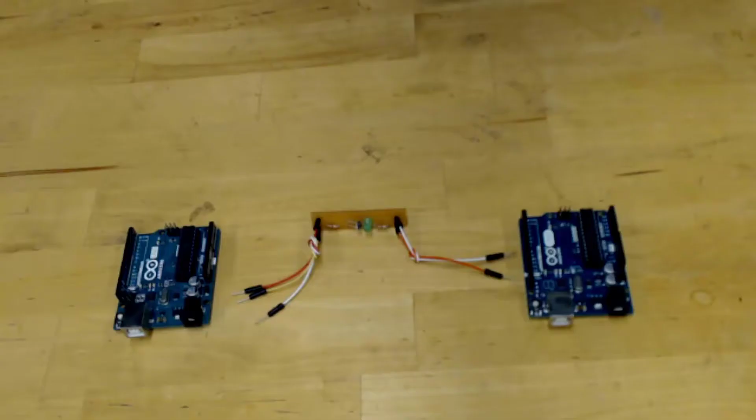Today we're going to build something called an optical isolator on our PCB mount. It's going to allow us to send a signal from one Arduino to another. We have an Arduino running MATLAB that sends a signal to turn on an LED, which is then interpreted by another Arduino running the Arduino IDE. We'll do this all through a PCB in the middle.

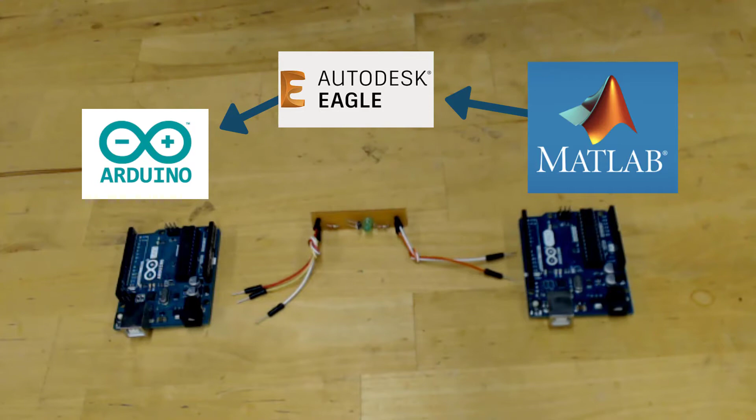To start this project, we're going to be using a software called Autodesk Eagle, which has a free student version.

When we open up Eagle, it's going to look like this. This is very much a navigation page, which allows you to go make either board layouts like we saw on the circuit board, or schematic layouts, which show how the wires are connected within it. It packages things into projects, and I've got one down here that we'll be utilizing and developing today, for my optical isolator.

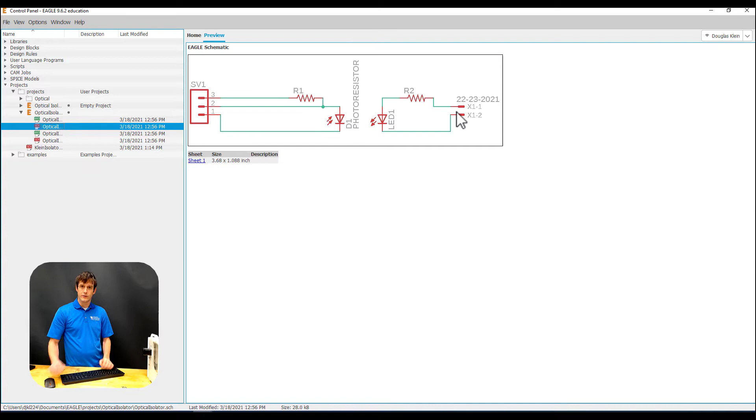This green E is the beginning of my project, and inside that I have my schematic, which is the layout we have here. These are 3 pins going to my Arduino, a resistor, a line for voltage reading, and a photoresistor, so it's just a voltage divider with a photoresistor. On this side we have an LED and a resistor, and then 2 more pins that go out to a different Arduino.

When I build this into my board, it's going to look like this. I've tried to map out where all the wires are going, so there's spacing, and so my components are close enough together to be easy to arrange.

To get started here, I'm going to click on New Project. It's got it down here now, and I'm going to title this as my last name, which is fine. I'm then going to go in here and click New again, and start with the schematic.

Our first step is to import our library. I'm going to go up here and click Open Library Manager, go over to Available, and click Browse. I've downloaded a library file called Optical Isolator Library, which has just the components we need for this build. I'll select Open, and we should see it populate in here—there it is right there. I do need to click Use; if I don't click Use, it doesn't go into the system.

Now I can close out of this and start adding my components. I'm going to go down to my optical isolator and bring in my 3-pin connector, working left to right the way you saw in that image earlier. I'm going to place that right there, my 3-pin connector.

Then I'm going to add a resistor. Notice it doesn't let me set the size of the resistor here, because we're only worried about the PCB, which has those holes there. Then I'm going to add my photoresistor, right there.

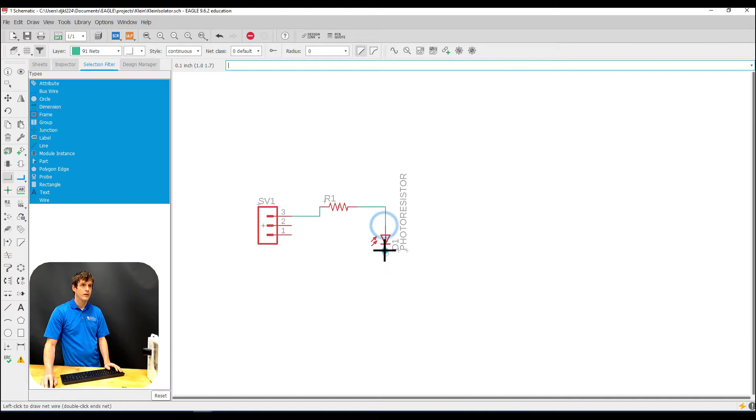Since I have that there already, let's start making connections. I'm going to go right here to there, right there to there, and back around to there. My middle pin is going to be checking for my voltage divider, so I just need to connect right there, and the dot lets me know there's a connection. We're now going to make the opposite side here.

So now that schematic is done for what I want it to accomplish. In other words, I want wires to go from my board to here to set up my voltage divider, and I want wires to come from my other Arduino to just light an LED up.

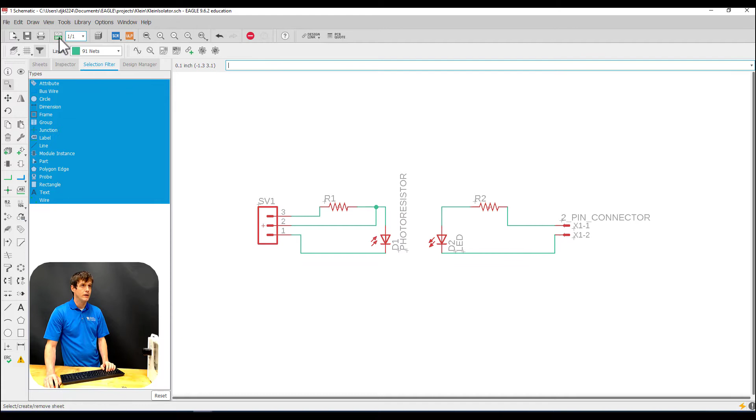Next thing we need to do is develop a board file, and there's a button up here that does it for us. It asks if I want to create one from the schematic, and my answer is yes. When we go into the board file, it opens up this space, which is the board I'm going to work with, and down here are the components I've inserted along with the connections we've placed. I just need to bring these over and space them correctly.

So I'm going to use my move command right here, click on one of my items, and drag and place it. When I right click, it allows me to rotate it, which is nice. I'm then going to use the move command again and drag that—right there looks good—and use the move command again to put this one right there.

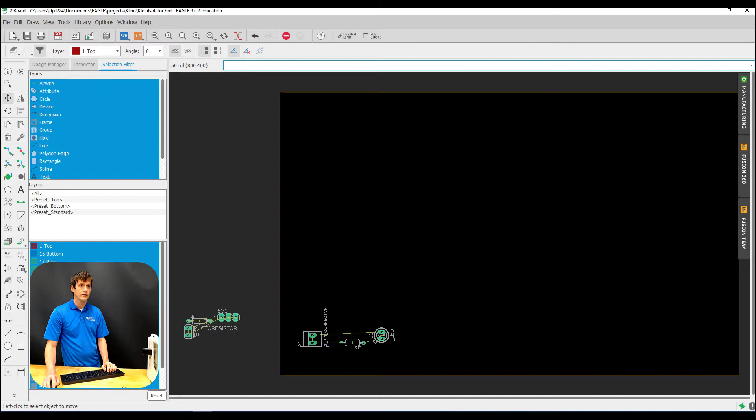I'm trying to make it so the wires aren't crossing over each other, so I spun that resistor around because I had the wires coming from this side of the LED. And then you're going to do the next one.

Now with things oriented correctly, I want to drive everything to that bottom corner so I can be conservative with my board. Once I have the setup where everything looks compressed, I'm going to grab the corner of my board by scrolling my mouse wheel, and direct it to where it's nice and flat.

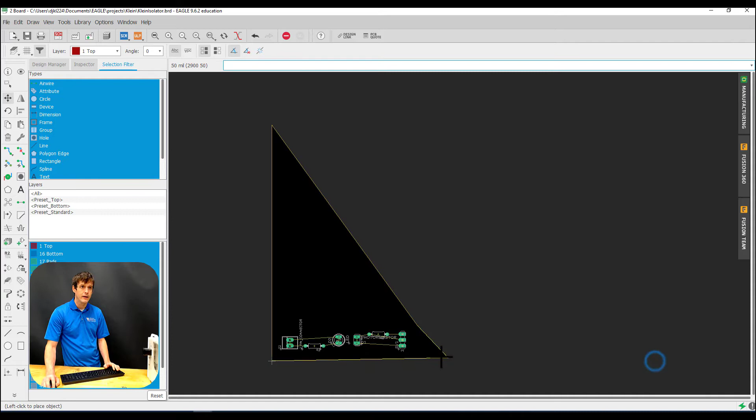Now that I've got all my parts in the right spot and my board shrunk down to where it needs to be, I'm going to add my traces, which are my wires in this situation. I'm going to route a wire, and before I do, I'm going to set the wire width all the way up to 20, which is just talking about the thickness of the wire we're adding.

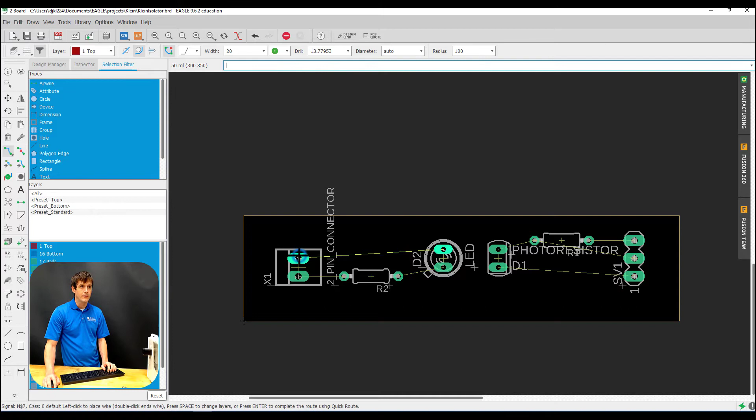I'm now going to add a wire down here, add a wire here, add a wire to there. We're kind of doing a little Ghostbusters here, meaning we can't cross the strands, so I'm trying to give myself some space as far as how that works.

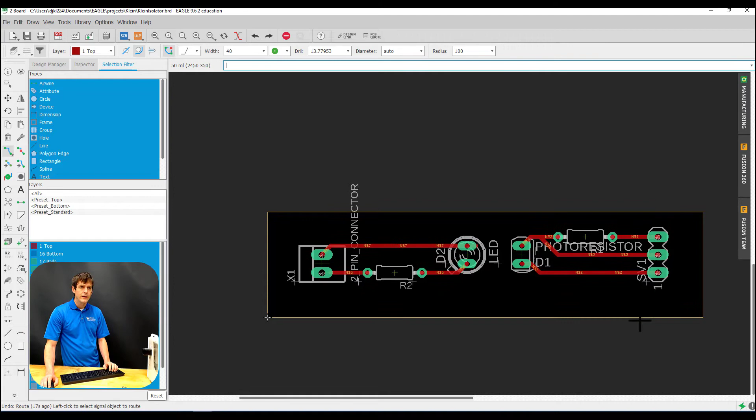That's looking good, but I see that I have plenty of room to make these wires bigger, so I'm going to go in and retrace them again with the 40 width.

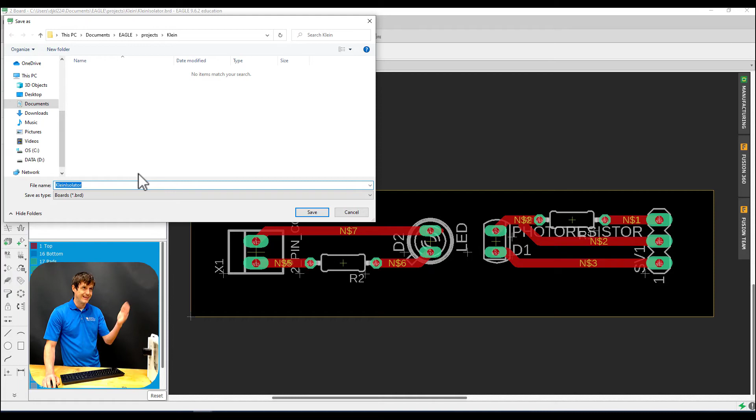Once I have that done, I'm in good shape to save this file. I'm going to go File, Save As, and save it as my last name, as the board file, or just click Save there. Once I've done that, I can take it over to my PCB mill and start milling it.

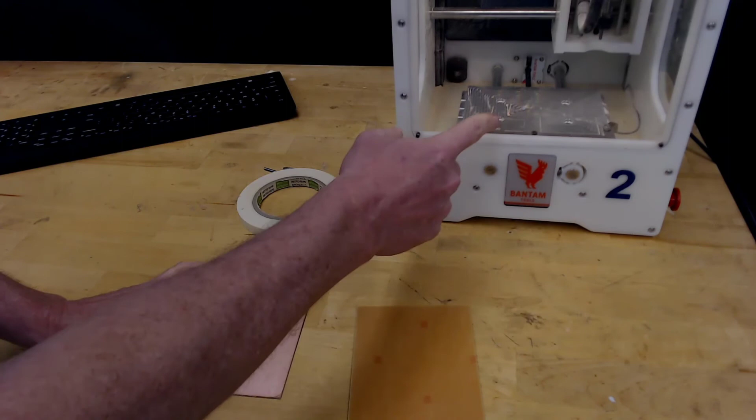Once my machine is ready and homed, I want to be able to utilize a single-sided PCB board, and I'm just going to use the tape which comes with it, which is Nitto tape.

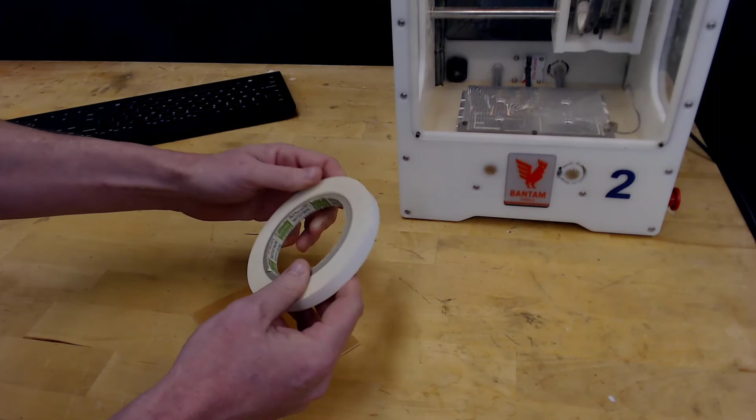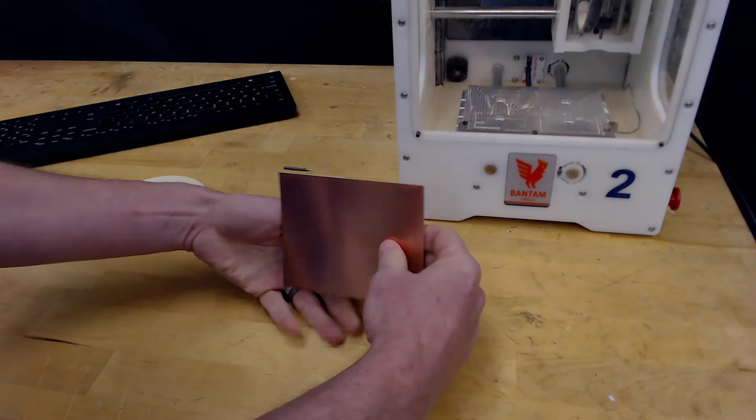I'm going to put one strip down here, one strip on the top. Screw down real good, pull the back side of the tape out, and then place that inside the machine. Press it down real well.

Now what we need to do is open up the Bantam Tools software. This isn't going to work without the machine actually connected to your computer, so you may have to go to the lab or find one of these machines to work with it.

I'm just going to check real quick—I'll not worry about the tool right now. I'm going to check my fixturing in my bracket, which is there. I have a single-sided PCB in there, which is great, and I have homed my machine.

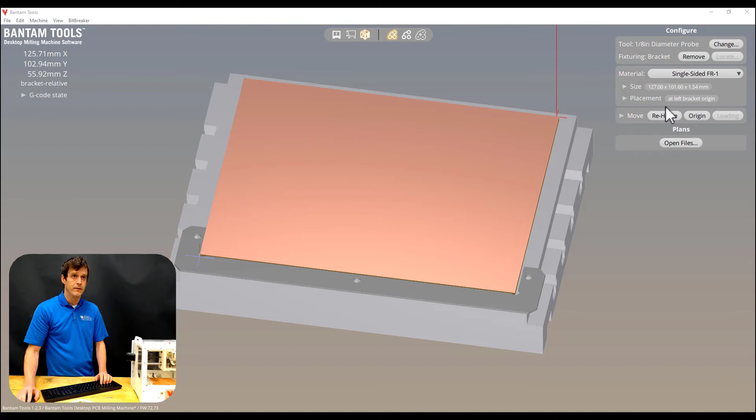Now I can go through and actually add a file that I'm working with. I'm going to click Open File, navigate to my file, which is an Eagle Projects Klein, and I've got Kleinisolator here. It's going to be the board file rather than the schematic. Open.

I'm going to zoom in. Beware, it does allow you to sort of work with the placement.

The first thing I'm going to do is my traces with my PCB engraver bit. I'm going to have to insert that bit, and when I select change, it will walk me through a prompt of how to change that tool. I'm just placing the bit in the collet there. Once that's good, I can click Mill All That's Visible, and it's going to go around and cut these parts for me.

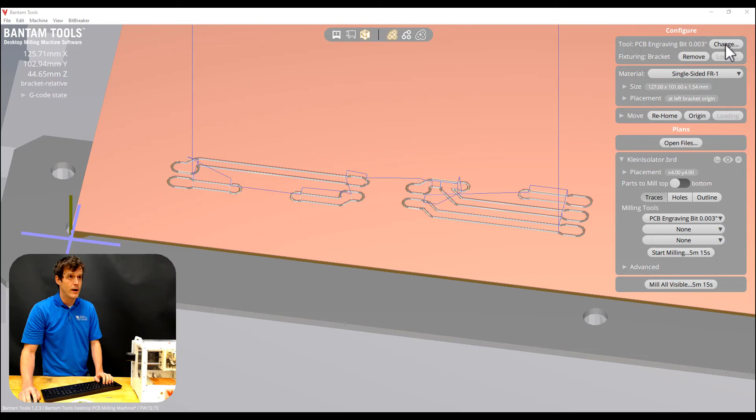Now with that done, I'm going to go through, deselect traces, select holes, and insert my 1/32 flat end mill, changing my bit out to it.

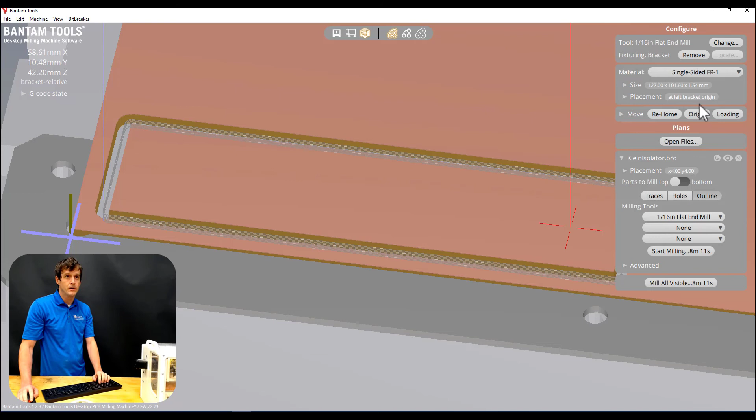Our last step here is just to do the outline, and I'm going to remove the holes with my 1/16 flat end mill, going through and changing the tool out.

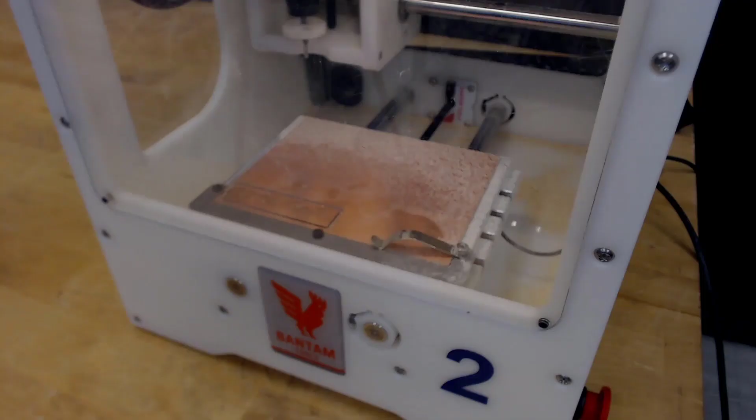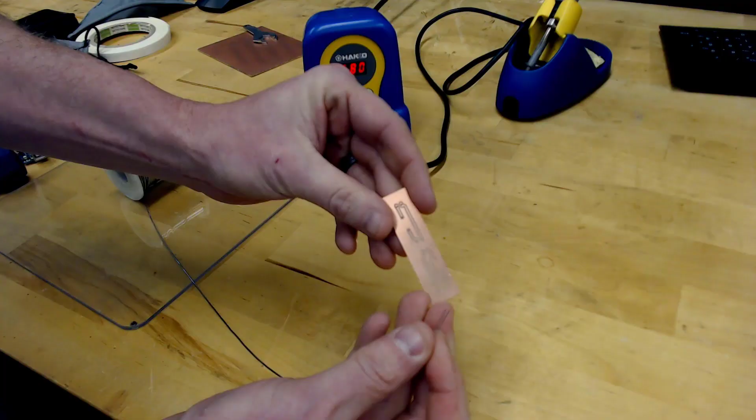Now that's done, we're going to click loading on the screen, and go in using a standard screwdriver to pry out our part. All right, so now that we have that, I'm going to go ahead and insert my parts, setting them through on the side that doesn't have the copper on it.

I'm going to bend that over, and then we're just going to solder those parts into place.

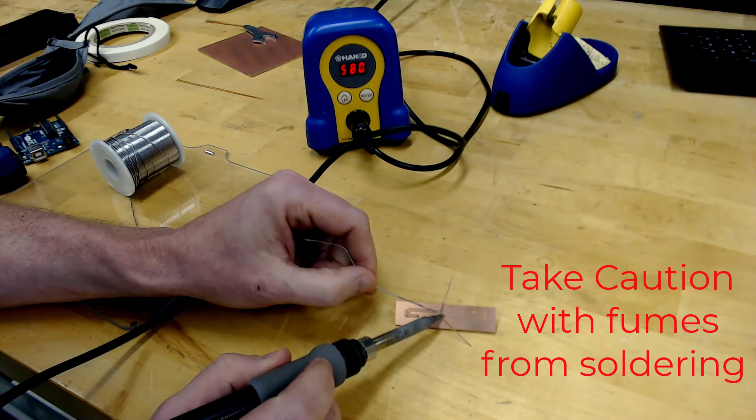Once we're done soldering, we're just going to look on the back and make sure we're not bridging over any connections with the solder—in other words, where we were milling, that is clean of solder. And then we just have our part, and we can take that and implement it in our circuit. Good luck with it.